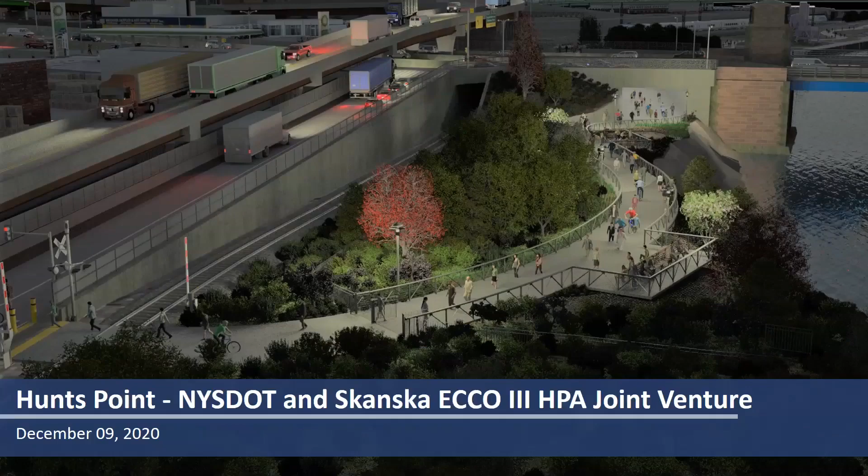This is Vinny Evola, Vice President for the Skanska ECCO Joint Venture for the DOT project, Hunts Point. I'm going to share my presentation with everyone, okay? Go ahead, let me make sure. If you can't see it, let me know. Is it up? Yes, Vinny, there's just one thing: if you or Sylvia can email us this presentation so we can have it documented for the records. Because this is a public meeting, and I would really appreciate having it also. Thank you so much.

No problem. So good evening, everyone. Thank you for allowing us to have a few minutes with you this evening, and anything we can do to help the community and inform the community is welcomed. We know we're very intrusive, as all construction projects are, and anything we can do to help, we're certainly willing to listen. So without further ado, I'll give you a quick update on where we're at, and then there'll be time for questions and to address some of the concerns you've already mentioned. I'll give a quick overview, some schedule, and then Q&A.

So in terms of the overall goals of the project, the whole plan is to get the trucks off of the local streets. That's the end result of this project—getting them right from the Sheridan, right down Edgewater Road, right into Hunts Point Market, without having to do all the twists and turns around the neighborhood.

It's going to be a long-lasting, low-maintenance project. We're going to be redoing some of the bridges, in particular the Bruckner over the railroad, and then the Bruckner corridor. East of the bascule bridge, we're redoing the Bruckner corridor there. We want pedestrian access to be improved, and we're going to have two new parks on both sides, and an underpass underneath the Bruckner.

Of course, we need to deliver this project safely and get it on schedule for everyone and within budget. We're the first of three contracts. The whole program is divided into three different areas, so we're the first one. The second one will start next year, and the third one the year after.

Ours is a lump sum design build, meaning the contractor is responsible for the design. DOT owns it, and I'm with Skanska ECCO—we're the builder—and Sylvia is the community liaison, who you mentioned earlier.

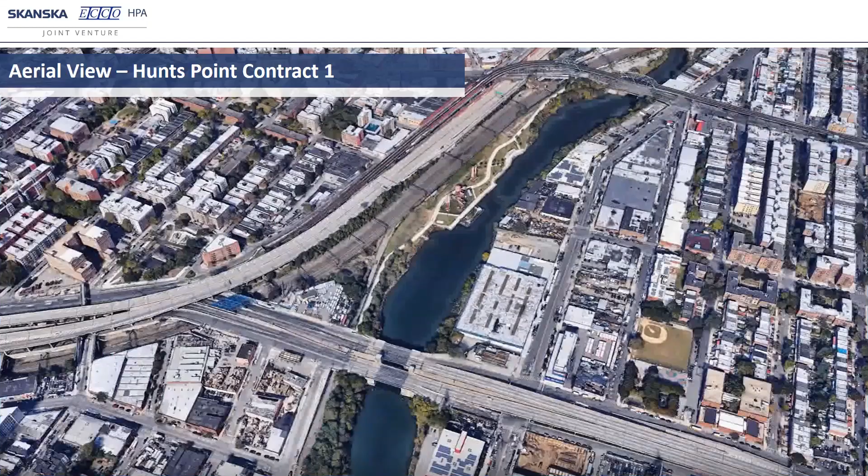This is a rendering of what it's going to look like at the end. When I said the idea was to get the trucks off of the local streets, you can see there's a brand new ramp right in the middle of the page here where we're going over the Bruckner—Edgewater, over the Bruckner, over the railroad tracks, and then down into the middle of the Sheridan.

That'll allow trucks to go right from the Sheridan into Edgewater and vice versa. Also, if you're going northbound on Sheridan, you'll be able to hook in on that other side of the ramp. That's the major feature, which is going to help improve traffic in and around the neighborhood in the long term.

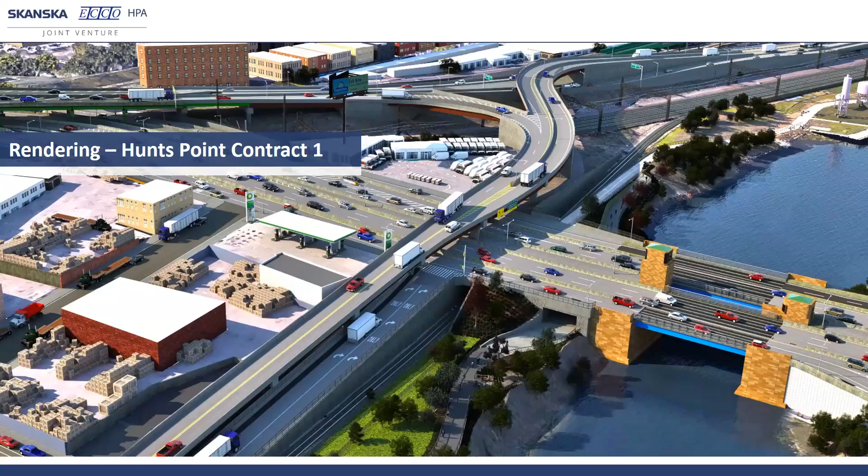The second rendering is just looking at it from the other side now. This is Edgewater Road going north, and you'll see the ramp over the railroad, a different look, and the bascule bridge in the middle, which is a historic bridge. It does not get touched during this project. East of it, there's a lot of road work and reconstructing—we're doing a whole new roadway there.

Again, another look, but this is focused on the parks. There's going to be a pedestrian walkway right through the park on Garrison, and a tunnel underneath, so you'll be able to get to the concrete plant park—you can walk up and down both sides and get underneath the Bruckner there.

You can see Edgewater Road, what it's going to look like, which is one lane north if you're not going to be on the ramp. The ramp is two lanes, both directions.

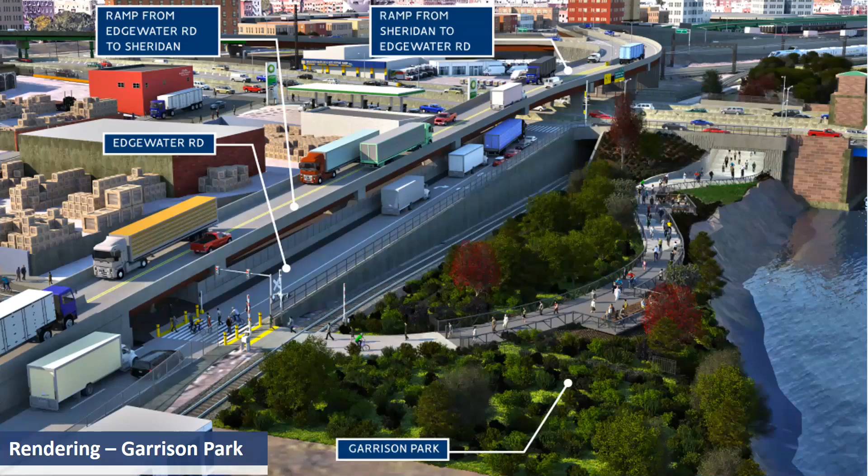A quick update on schedule: since it's a design build project, a lot of the first year was focused on design. That's now complete. Construction has ramped up, and we'll probably get even busier this spring. The overall project duration is 42 months, so current project completion is spring of 2023. This is for stage one of three projects, so there's still two more that will be going on concurrently with this.

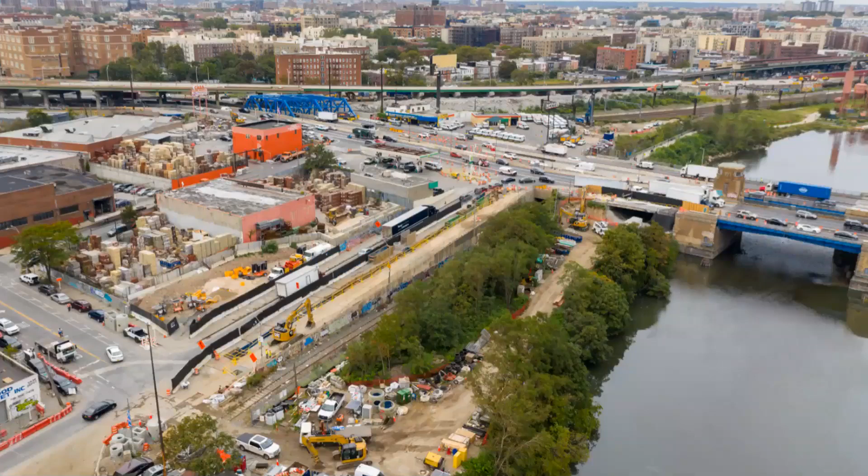This is the Bruckner over Railroad. The existing bridge over the railroad is being raised and getting a brand new deck as we go across. Then when we get to the other side on westbound, we're actually going to replace the truss bridge, again putting in brand new steel and a brand new deck.

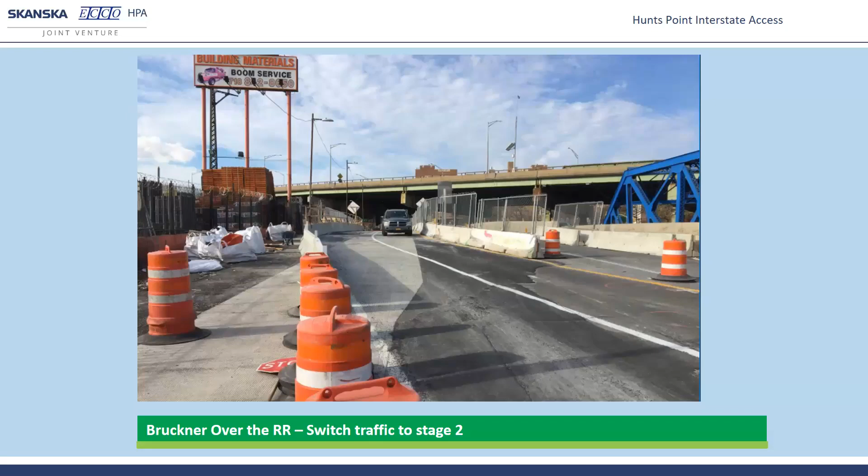So that whole bridge will be brand new over the railroad. We completed stage 1, so we've already put traffic on stage 1, and now we're working in the middle of eastbound Bruckner Boulevard.

We've actually completed all the steel erection. The next stage now will be to do the concrete deck on top. Then we'll put traffic there, and then we'll work our way across the road, stage by stage, lane by lane, keeping the amount of existing lanes currently.

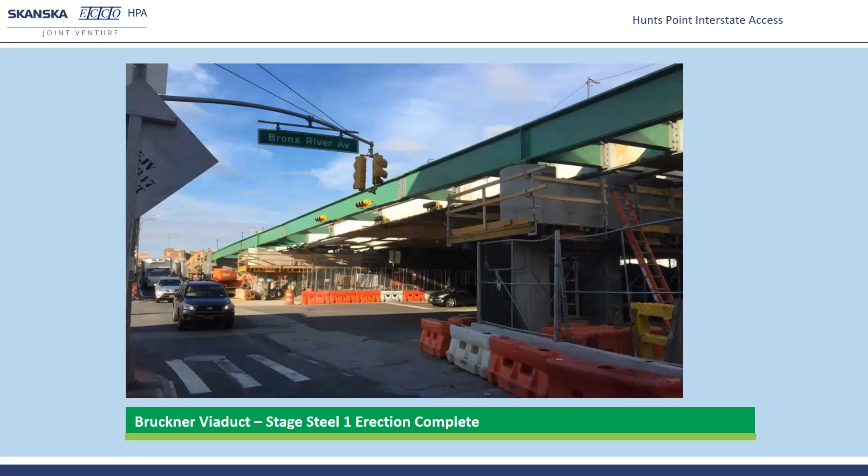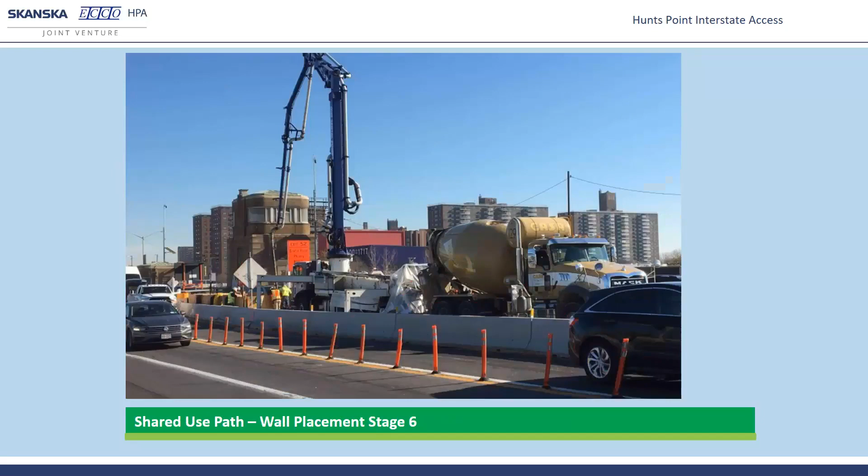This is stage 6 of the SUP, the shared use path underneath the Bruckner that we're doing for the pedestrians. This is a wall pour that we had to do in the middle of the Bruckner, again stage by stage going across the Bruckner so that we don't impede or reduce the amount of lanes.

If you walk through the park here, this is what you'll see now. This is stage 1 of the SUP, the shared use path, again the tunnel underneath for the pedestrians. We've poured these walls already. We'll pour the top, put traffic on it, and then move over to the next stage.

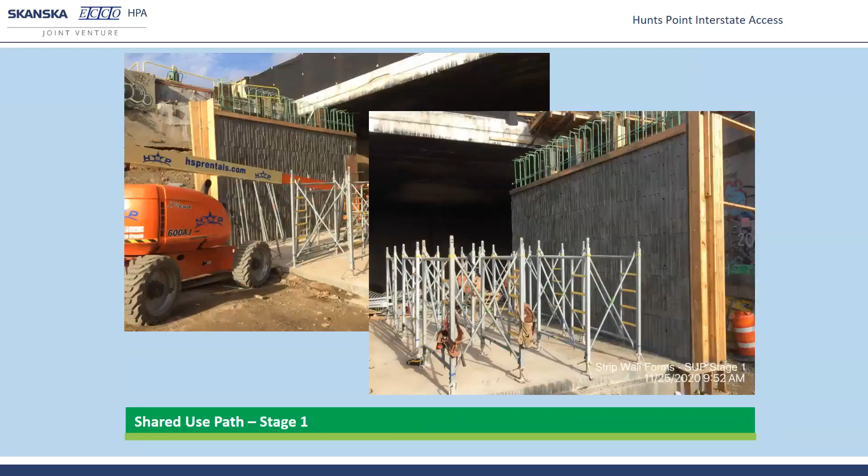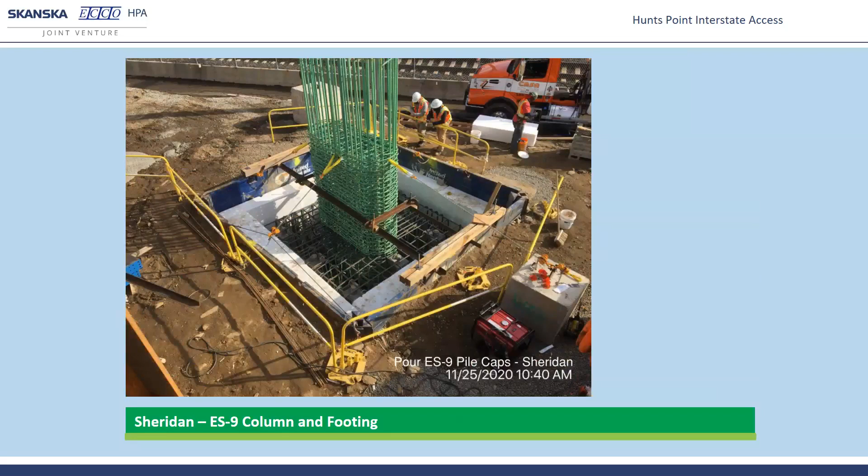Just another action photo of placing the concrete in the footing, with the railroad tracks and the concrete truck down there.

In terms of the overall presentation, that's where I want to open it up to questions and concerns, and see if I can answer anything. If there's anything I can't, I'll certainly get back to you. But at this point, feel free to ask away.

Maria? Okay, yeah Bobby, did you have something you want to say? No, I'm just saying, you want me to open it up? I'm sure you got a whole slew of questions. And LaShawn has said she has a question. Okay, why don't you ask us? Yeah, give me one second, I'll let LaShawn know.

So Vincent, thank you for that. We went through a really tough time just around Thanksgiving with this project and the traffic that was created because of it. I know you're the contractor, not necessarily State DOT, but one of our requests is we need more traffic agents around at certain key points, especially around the holiday time. The Thanksgiving rush is over, but we're going to have the Christmas rush, and these are important times, especially for the market, with bigger trucks coming in for delivery, which congests everything and throws this neighborhood into haywire for a bit. So I was wondering if there's anyone here tonight that can present, discuss, or address that issue for the future, because I feel like in the next two weeks we're going to be right back where we were in November. So is that you, Vincent, or is there somebody else?

The State DOT is on. I mean, Benita, are you on, or would you like to address that, or do you want me to?

Just to be 100% accurate, can you send that information, what you're suggesting, where we have that, to Sylvia, so we can look into it, and I will raise it up higher and we will ask for more TEA agents.

Yes, Ralph can do that. No problem. Sure. Okay, please send it to us, that way we know, and we will put the appropriate location rather than speculating where you want it. So I just want to make sure we're on the same page, and we can do it. This one is working out well, but I would rather meet you face to face.

But under the current circumstance we cannot, and I don't want to lose any of the agents we have right now. No, I'm not talking about replacing them, I'm adding them. Okay, I got it, okay.

No, I was just going to say, while we're marking locations, and I know we're talking about how it backs up, the intersection at 163rd and Southern Boulevard and Hunts Point Avenue, when that gets congested, it also causes a backup on the westbound side of the Bruckner of cars that come off there. So maybe some traffic agents to avoid having that intersection congested, because, as you said, it's a domino effect. But I see that happening there, and I just wanted people to know.

Why don't we do this tomorrow? Miles, you give your suggestions, Maria, yours, I'll send to Ralph, and then Ralph can compile an email of, as per our conversation, these are the locations we need. Well, I was going to send it right now, but I'll discard it and just wait for you guys to give me your locations, and then I'll send it.

Okay, I have another question for you guys. When you put together, based on your experience, what are the timings where you face the maximum congestion?

Obviously, it's the rush hour, I would say, from 1:30 p.m. to 3 o'clock, people going home from whoever starts early in the meat market, food market. People start going home about 2 o'clock. Am I correct, Maria? So is it an evening rush hour that's questionable, or a morning rush hour? What are we looking into?

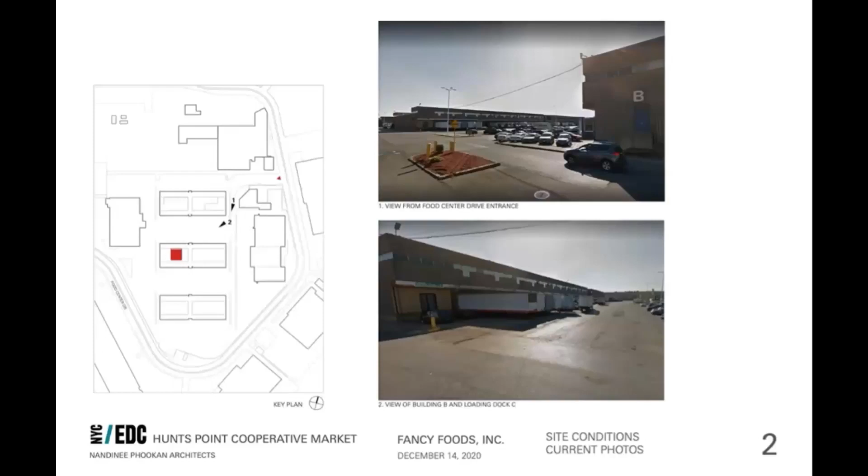Again, this is the entrance to the facility. In the center of this facility is where the main entrances are. The spaces acquired by Fancy Foods are to the right, where it says Mountain States Rosen, and they have acquired the first and second floors of this space. Next slide.

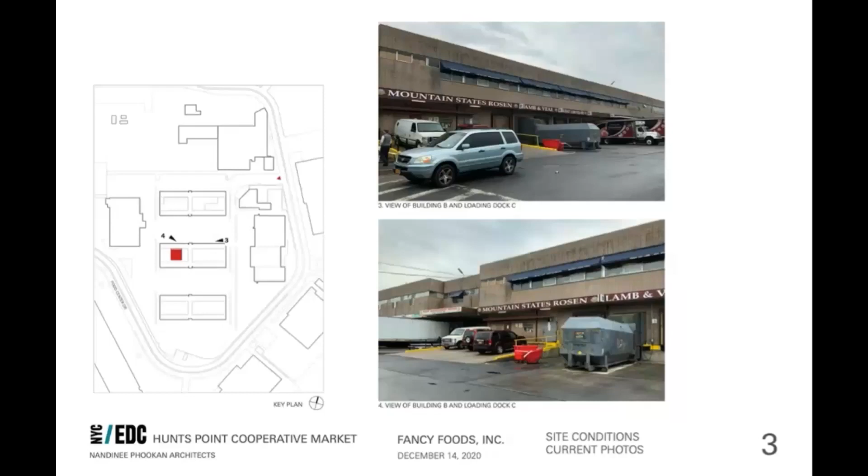Again, this is the main entrance to the facility. The bottom picture shows the roof area. We're going to be removing this roof area, approximately about 9,000 square feet, and then raise the roof. That enclosure will be insulated metal panels and a new roof to be able to weather the building.

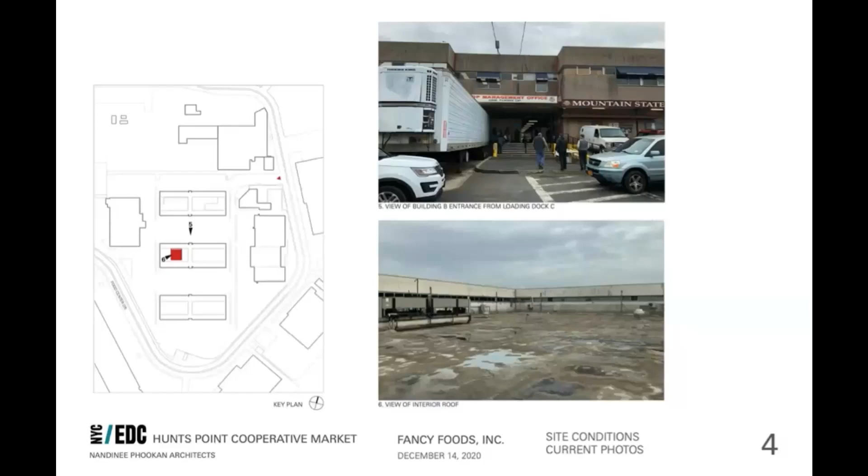Sorry, the next slide. Again, this is the new roof extension in Building B. That's the site plan. Next slide.

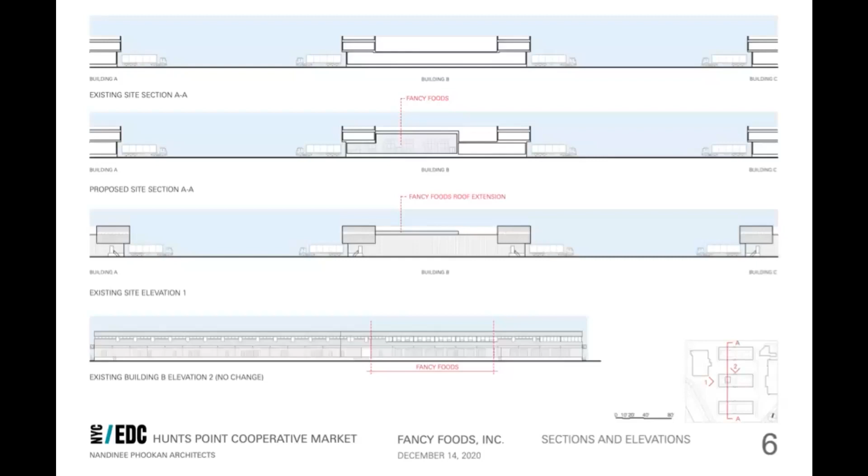This is a closer view of what we're looking at in terms of providing cooler spaces and a freezer. The freezer area is located on the first floor, and on the roof area, that's the roof that's going to be extended above the existing roof you saw. All the shaded area again is the spaces that have been recently acquired. The next page.

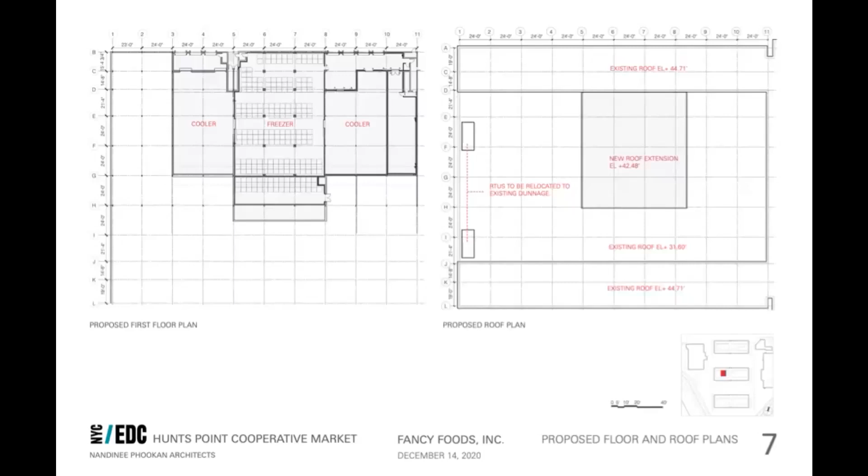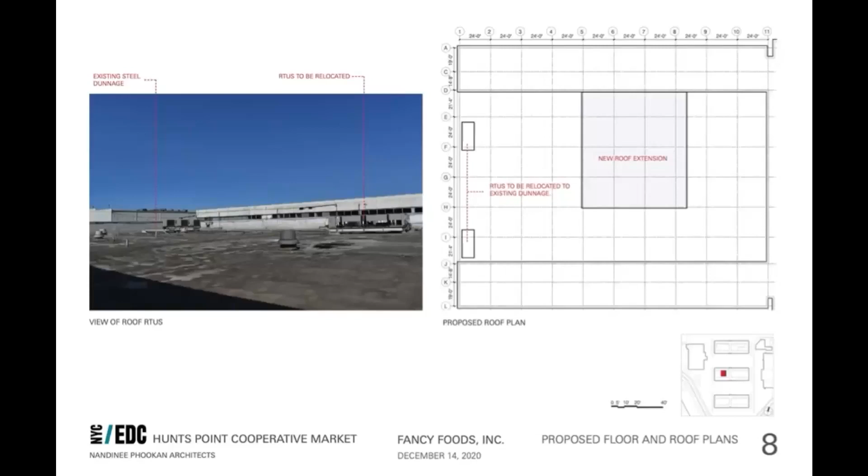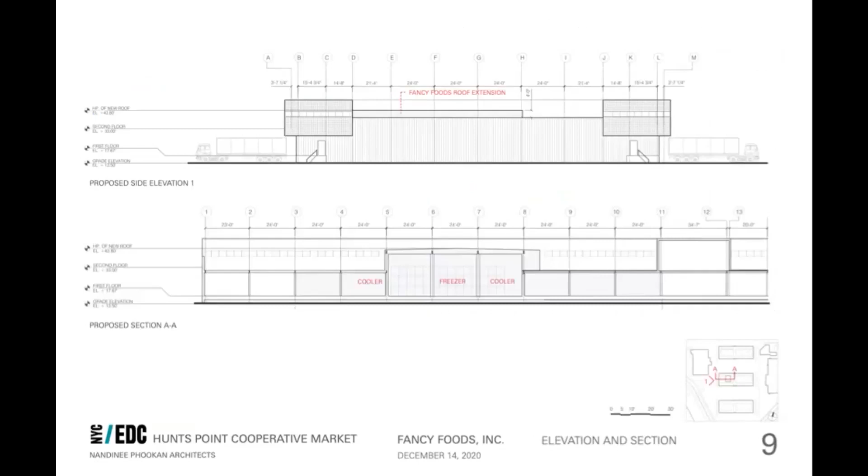This slide shows a self-contained area of freezer. Everything inside is going to be all metal panels, insulated metal panels, and the new roof extension is shown in the upper right-hand corner, showing also insulated panels and a new roof.

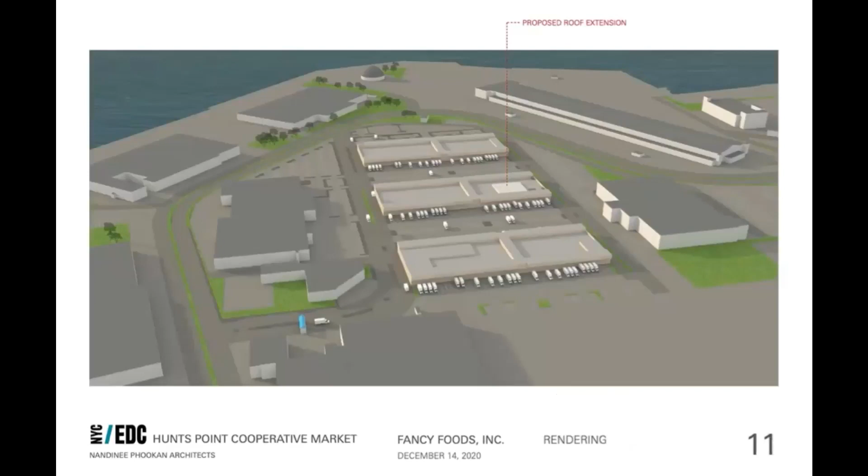This is a rendering of the market. Building A is the first building that you see. We're in building B, where the proposed roof extension is going to happen, and again it's within the boundaries of the overall roof area.

As you can see, several other tenants have done the same, like in building A and the buildings to the left and right of building A—they've extended above the existing roof. So these projects have been done before, and we're just here to present what we would like to do for this project.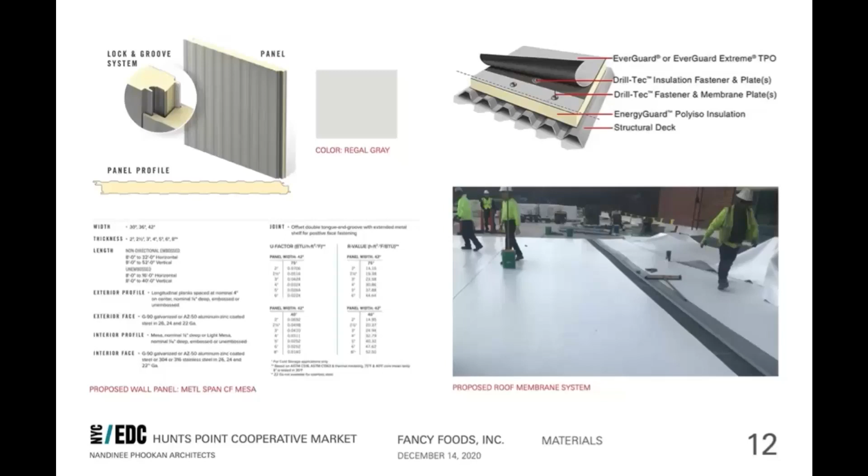I think that's the last slide. So if you have any specific questions that I didn't really touch upon, I welcome your questions at this moment.

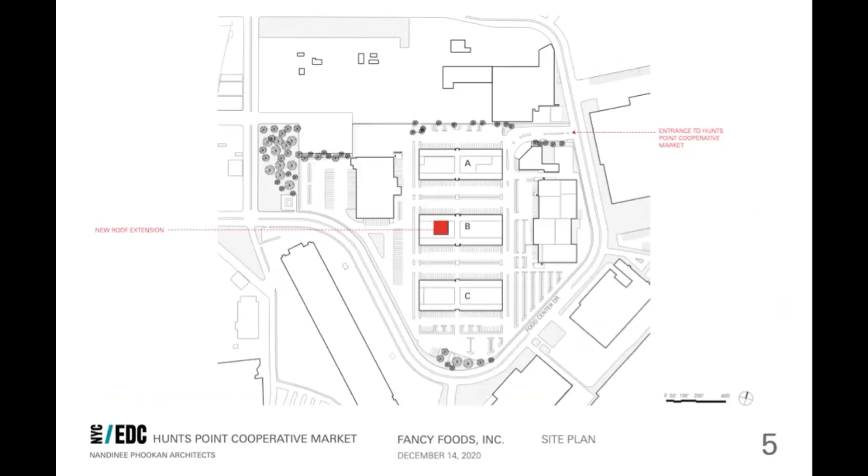I work with Point CDC, a nonprofit in the community, and we're always looking at environmental justice issues, trying to push greening of buildings and businesses as much as we can. So, regarding the new roofing system you're putting up, have you thought about solar panels or green roofs for the units you're moving or replacing? Just want to throw that out there to try to alleviate some of the issues we have in this community. Is that a possibility, or is that an EDC issue?

Yeah, so thank you for the question. We did think about having a green roof, but it poses more cost to the structure, because as you know, a green roof adds weight, and we're concerned about the existing steel and what's being transferred down to the foundation. So we looked at that.

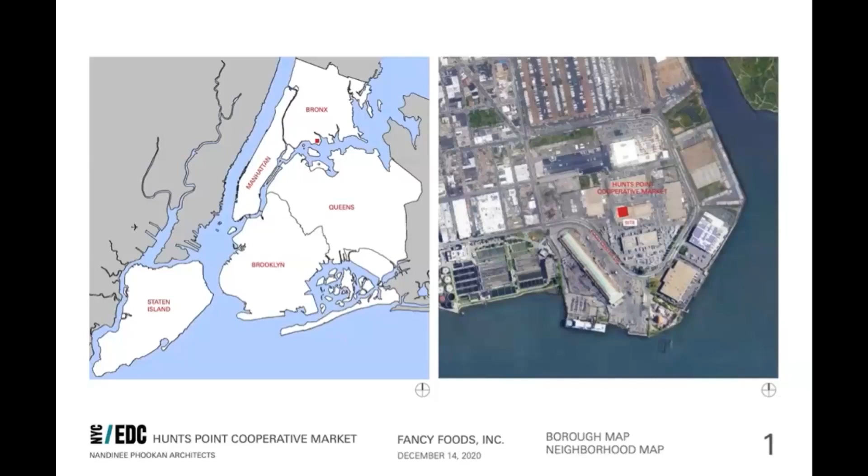Good night, thank you. Moving along, do we have any old business or new business? Any old business? I don't have anything for you, Maria. Okay, any announcements?

I have an announcement, okay Miles. I just wanted to bring to everyone's attention that the Southern Boulevard BID, I'm putting on my executive director cap for a second, is having our annual, I believe our 13th annual children's coat giveaway, winter coat giveaway. This Saturday, it's going to be at Councilmember Salamanca's office at 10 a.m. I think people will start lining up about 9 a.m. As always, Community Board 2 and anyone on this call is welcome to join or volunteer. Just wanted to let you all know.

Miles, about how many coats do you guys anticipate being able to get out? Well, this year we have 820 coats. It was a little harder to get them this year, so we're about 50 less than usual, but I should be moving all 800 coats with the auxiliary team tomorrow from Ponce Bank to the council member's office. So I'll know more about how many coats or how much it feels like tomorrow afternoon.